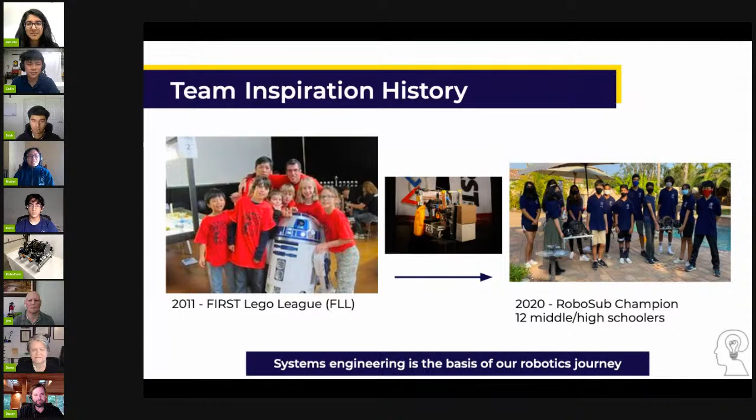Could you tell us a little bit about that pool? Yep, so this pool is used to test Navy material. It's quite large, and on the edges, it's very curved. So one thing that's actually interesting about that is when we were using sonar, it's supposed to simulate open water in the ocean. So we weren't actually getting many pings back from our sonar because it was supposed to just bounce off the wall and go off in different directions, as it would not come back in the ocean. So it's to simulate or emulate when you put something in the ocean.

Right, it's anechoic, I think that's what they call it. As I recall, it's like 4 times larger than an Olympic-sized pool, and I think it's like 35 or 40 feet deep. So it's not a pool like we think of it. It's really big. Yeah, I posted a link to this in the chat. You guys can check it out, and it seems like all types of people test their AUVs and different types of sensors in here.

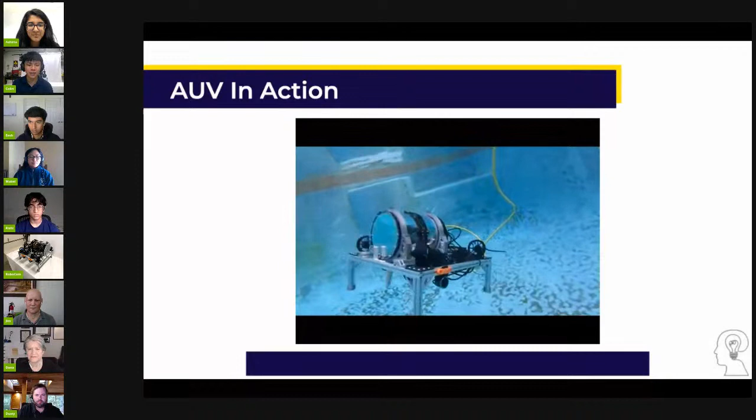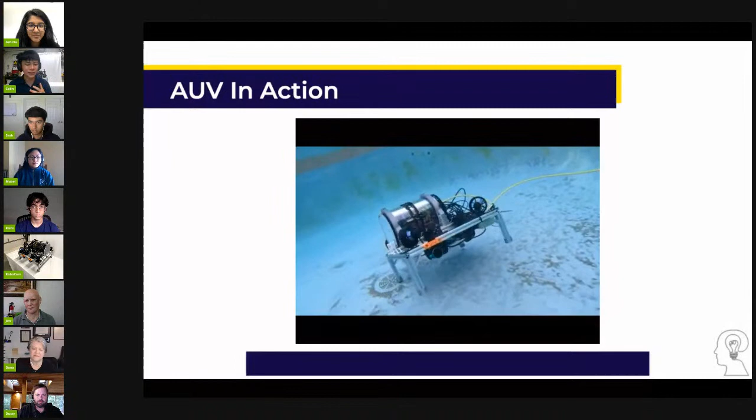So this is actually an in-water test of our sub. This sort of gives you the scale in a little bit smaller pool. We actually have a tether going for remote operations, but in this competition we're not allowed to use a tether. So because our Wi-Fi can't penetrate the water, we actually have to make our sub completely autonomous. You can see one of the main differences between an underwater vehicle versus a land vehicle is that now we have that 3rd degree of freedom. So our robot is pitching and yawing and then also moving in the XY direction as well.

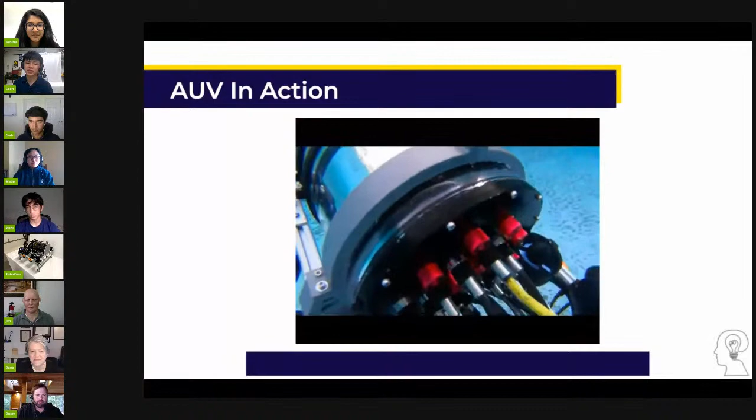And then you can see the different sort of considerations that we'd have to make: the positioning of our thrusters, as well as the penetrators in the back of our enclosure to connect up all the sensors into the electronics. So we'll be going a little bit more in depth about the system throughout this presentation.

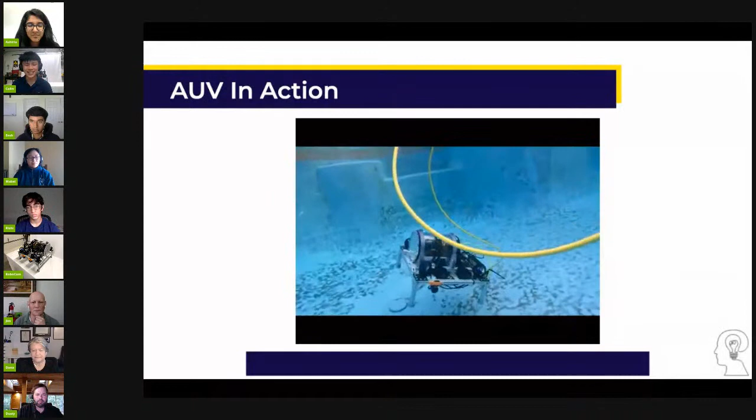Did you guys all build and design this yourselves, or is that something you just bought? Yeah, so we actually used an off-the-shelf ROV before constructing our custom one, just to get the idea and get the inspiration from it. But this actual sub was our third custom sub we've built, and we've just been building off of our previous experiences to get to this sub. Wow, that's so cool. I bet that takes a lot.

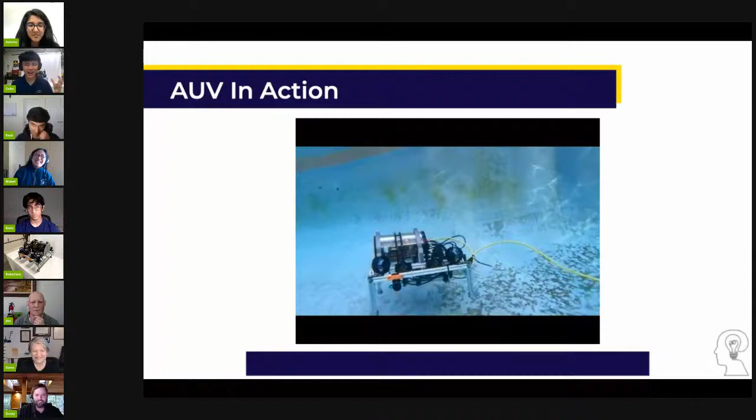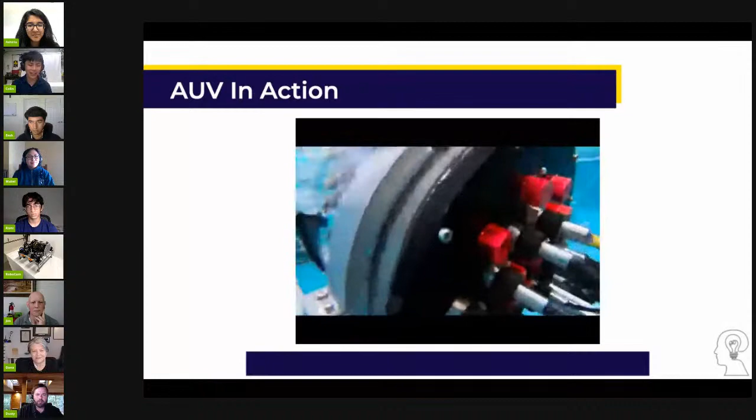Do you get any leaks? Yeah, so we've actually gotten many leaks, and this is sort of how we went to our newest penetrators. So the thing about underwater robotics is that when you pull your sub out of the water, you can actually see rolling water if any water has gotten into your enclosure. So that's something that we got to train our team members to see and catch. Some teams have leak sensors that, when they get wet, send out a signal to cut the thrusters and surface, but we haven't been able to implement that technology into our subs yet.

So instead, we submitted a technical paper that was under 10 pages that showcased the novel aspect of our system. We also did 2 skills videos. Ours were about sensor optimization and hull design, both under 11 minutes. This replaced the on-site judging, but also acted as a how-to guide for future teams who want to do RoboSub.

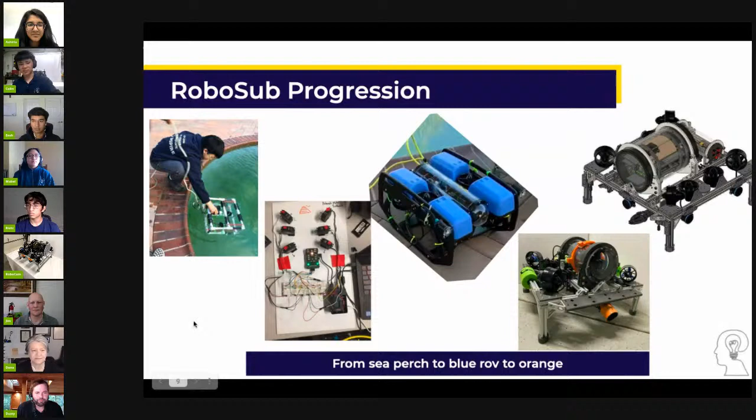Gotcha. You people scare me. I'm just going to go straight to the top.

We try not to. But just highlighting our competition time frame, this past year, we actually had 2 weeks of really dedicated and focused time to RoboSub. The season was actually compressed this year, and we had to finish up our finals previously. So to make the most of our time, we actually utilized parallel prototyping, and you can see this on the electronics board where we explored exotic options while also having other team members explore more traditional options.

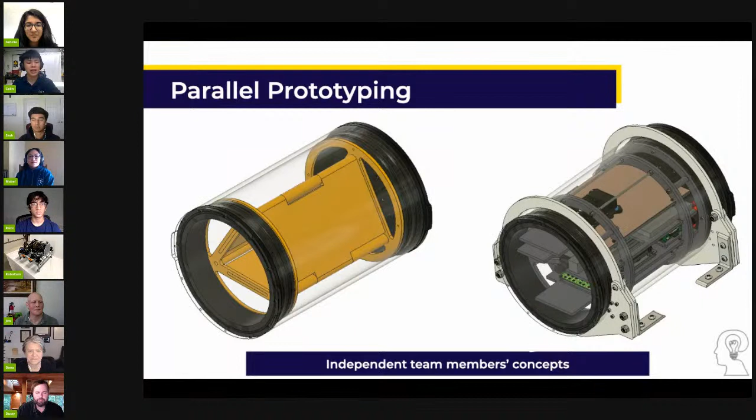And this, if you go to the next slide, is continued for our torpedo shooters. So this is actually one of the missions that Asheri was alluding to, where our sub can use pneumatics or any other propulsion methods to send out a projectile to go into one of the targets. And you can see 2 different options, either air power or on the right, an onboard battery and an onboard motor to send the torpedo out.

So you guys fully model this and make CAD models of everything beforehand? That's correct. And this is our way of communicating things to the judges without actually building them. And also this allows us to conduct design reviews with our team members and get different perspectives to make our models the best way possible before actually even testing.

Yeah, very professional. You guys should just do your own startup. You already got the whole thing down.

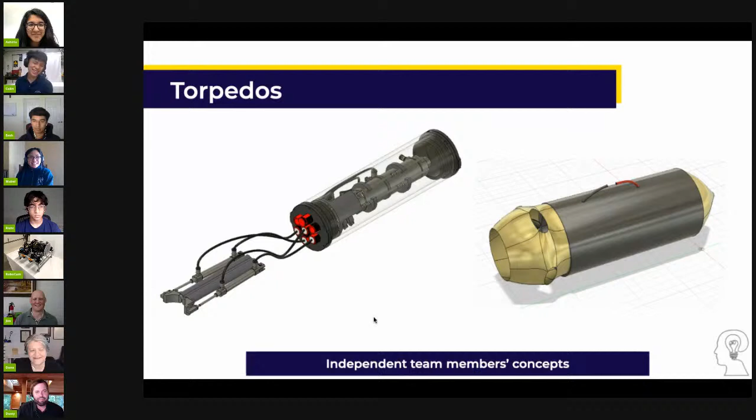Going on to the next slide, we extended this same idea for the electronics board, and we just wanted to highlight the tool that we use. We use Onshape specifically for the electronics board. They enable users to make their own tools using feature scripts, and the global variables were very helpful, as when you changed one variable, it changed multiple models around it. So that greatly helped us with our multi board design on the left, and also this server rack design using a PCB backplane on the right.

So is that like a custom backplane or just the enclosure? Yeah, so for our backplane this year, our third or second sub, Gray, I'm forgetting. But with Gray, the main issue we had was wire management. It was a mess. We did do a layer stack design, as we showed in our previous slide for Gray, which has a smaller enclosure, but it's kind of useless because if you have wires going in between the plates, you can't pull out any of the layers and troubleshoot or do any maintenance.

So to fix this, we custom designed a PCB backplane, which sits in the back, and each layer has another PCB attached to it. All the wires are localized within each individual layer, so now there's no crisscrossing wires going in between. The PCB backplane handles all the wire routing, power distribution, and we can localize generic components like USB hubs and Ethernet switches directly in the PCB backplane, so we don't need to use up that space elsewhere in the enclosure.

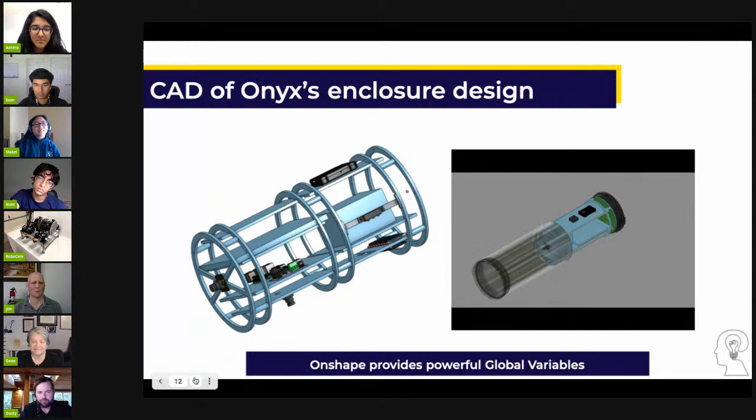Did he get disconnected? I don't see him anymore. Oh, yeah. Sorry. He dropped off. Colin, are you back? I am back. Thank you so much. Wrong shortcut. Yeah. No problem. Let's not click Control W anymore.

But anyway, moving on to our materials evolution. This is sort of highlighting the difference between subsurface and actually land vehicles. So our 3D printed components actually took a beating from the sun. The heat within the enclosure, you can see our electronics board actually bent due to all the heat within there. And obviously breaking off from sort of the small inconsistencies within the 3D print.

So we've actually since then moved on to laser cutting and then also reaching out to sponsors to use multi-jet fusion. So a little bit more expensive, more robust 3D printing manufacturing method.

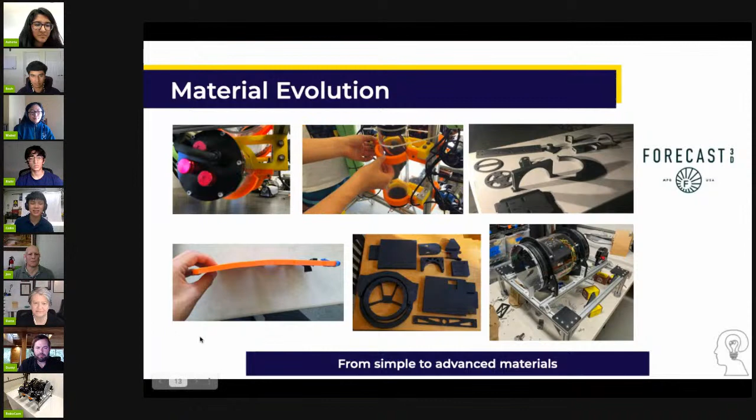How long does it take you to 3D print these? Yeah, so actually our previous print with all of the correct settings, it took us 24 hours to print 3 components of our enclosure clamp. So Ashia, if you could actually go on to the next slide, or actually next slide after that, pardon. You can see this is the enclosure clamp that I'm talking about.

So this is actually 4 components all slotting or fitting together. And 3 of these pieces actually took a full 24 hours because we had to print it with 30% infill and ensure 3 walls. So we're slowly increasing our print settings for even more durable components.

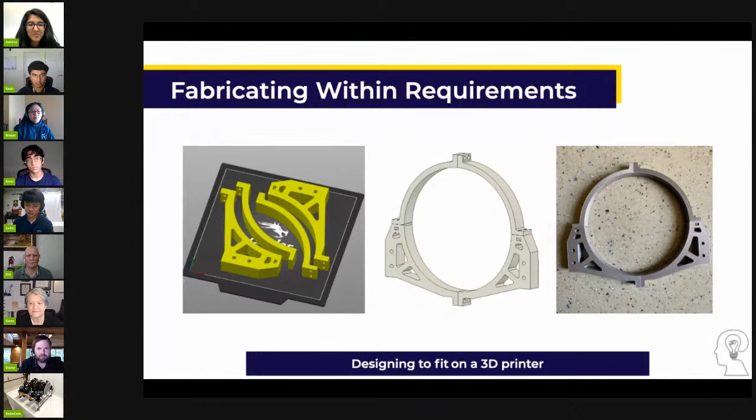And then sort of backtracking, we actually used stress analysis to see potential breakpoints within our 3D printed parts. And you can see a lot of the hinges and a lot of the corners where planes intersect took a lot of the force from the compression of the enclosure tubes. What tool did you use to do this analysis? We use Fusion 360.

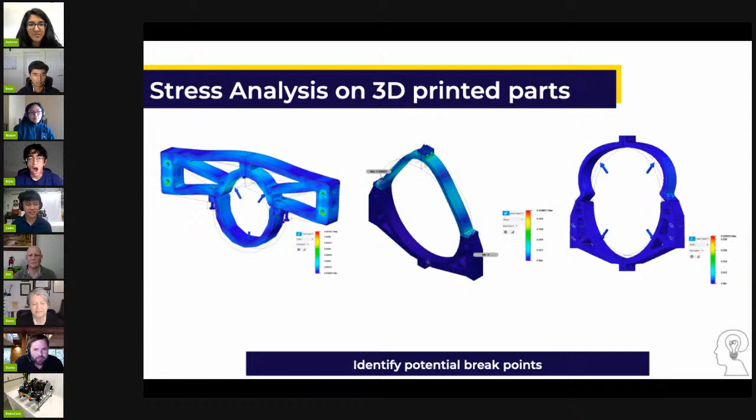So just as Colin talked about our iteration and evolution of the actual sub, we also worked a lot with making our tools better. To go back, in the very beginning, we mentioned leaks when it comes to our enclosure. In order to prevent these, the best way to go at it is use a vacuum pump, see if there's any air leaks. So you pretty much form a vacuum inside the enclosure and you see a gauge. And if the gauge shows that the pressure is increasing, which means there's an air leak somewhere, that also probably means you'll have a water leak in that same spot.

So before we had a standard off-the-shelf vacuum pump, and that was handheld and it took a lot of effort. And after a while, it actually wasn't accurate anymore and we couldn't rely on it. So then we took it into our own hands and we custom designed our own electric vacuum pump using a standard motor, which I think can go to -20 kPa, something like that. So that does the job as far as vacuum testing goes.

You just turn it on and leave it, and you can let it do its thing while you're doing other things. So that both saved us time and also a lot of handheld laborious work, which was really useful, especially when your hand got sore after doing it for like 15 to 20 minutes of just pumping that enclosure.

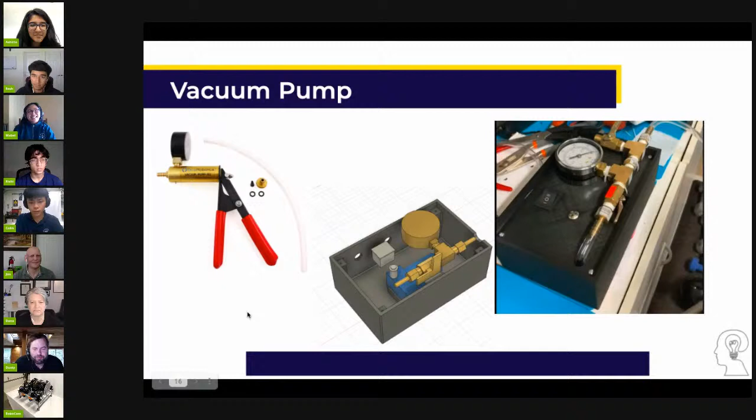Another thing was we changed our penetrators this year. Before, we had these standard epoxy-based penetrators. Pretty much, think of a tube and you stick the wire through it from the outside cable, and then you just fill up the remaining space with epoxy. You pot it and it would work, but sometimes you would have these little air bubbles or air gaps, which aren't normally visible to the eye.

So this also helped a lot with maintenance because we had an issue where some of the motors weren't working and we weren't sure where the issue was. We could just plug different motor cables into different ends on the enclosure caps, and we could see if the same motor is working on different ports or not.

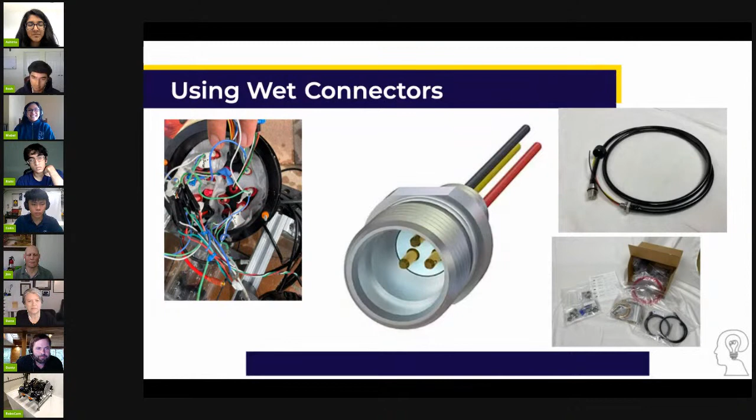All right, and this is a personal project, as I've also been the hydrophone lead. Hydrophones in this challenge are pretty important because one of the tasks is there's pingers along the pool. There's 3 different pingers and each are at a different frequency, beeping about every 2 seconds at 25, 30, and 35 kilohertz. So above human hearing range, but within the range of standard hydrophones.

In our version 2 design, we put in an active filter as well as an amp inside it and some other digital components such as a digital potentiometer, which would handle adjustable gain, if we wanted to increase or decrease the volume of the hydrophone signal. In version 2.1, I think I also added another filter at the very end of the circuitry to isolate any noise that was introduced. So this would make for a really clear signal, so you could hear exactly the frequency you want.

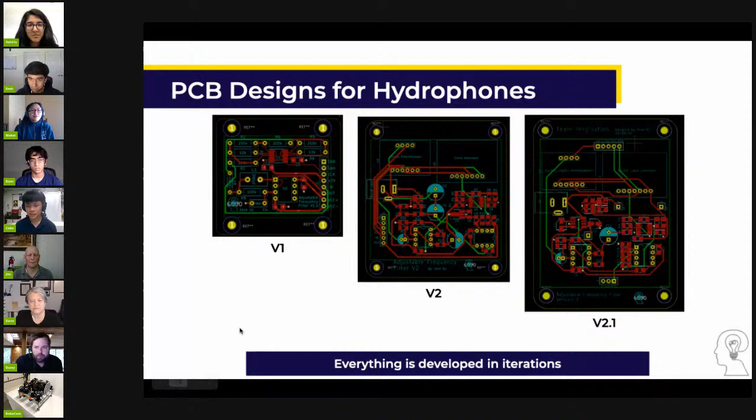And if we move on to the next slide, you can see this is what I've been working on lately. On my camera, I have one of the daughter boards right here, which I've designed. So 3 of these would plug into our main motherboard just for the hydrophone subsystem. All of our power distribution is localized entirely within it. And each daughter board contains the filtering circuit for each hydrophone, each with its own gain adjuster, whatever frequency selector you want.

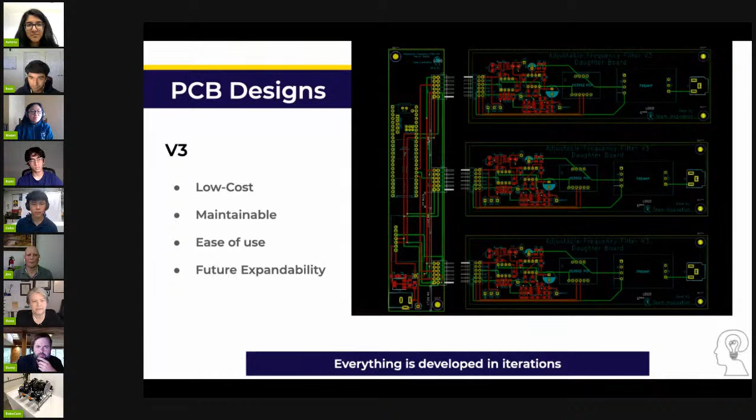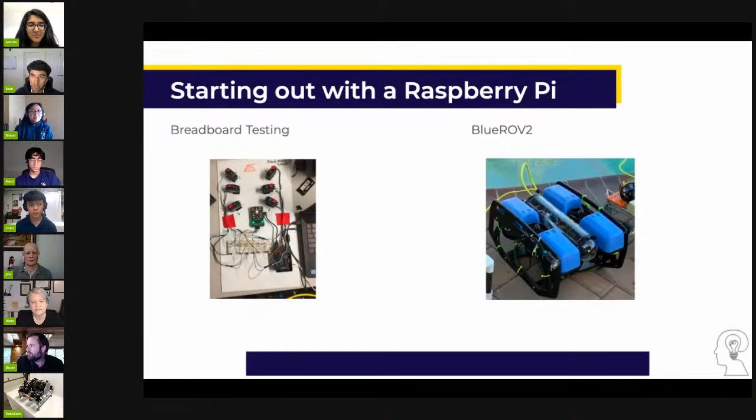So starting out, we of course started with the Raspberry Pi because it was what we were familiar with, and that was what was included in the BlueROV2. And then as we moved on, we realized we needed more. There were more requirements for a new processor if we wanted to do well in the competition. So we went to a Nano to be able to handle the CV, and it was also rather affordable and small, so it fitted our needs pretty perfectly.

We chose the Xavier AGX because, of course, more sensors means more resources required. We needed sensor fusion, robot localization, dynamic path planning, and of course, artificial intelligence, which the tensor cores in the Xavier AGX are really useful for. We also had a larger enclosure space available now due to us increasing from a 12-inch to 18-inch long enclosure. And we were also planning on putting in that heatsink, which Colin mentioned earlier.

This is just some specs comparing the Nano to the AGX, and you can see it's a pretty major increase, especially when it comes to that clock speed and the 4 more cores, and also that RAM. The RAM is that jump from another 8 gigs, and also it's now 256-bit, super important.

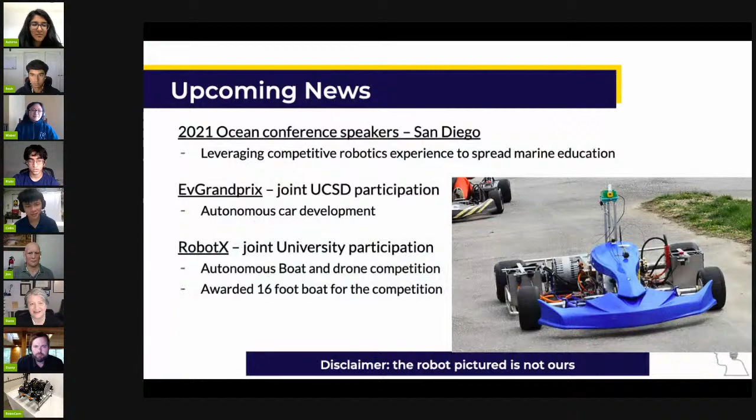This is all pretty cool. Looks like we're kind of running out of time, but I think we need to know what you're doing next, right? And maybe Mabel had something to say about that. Yeah, so our team actually recently got awarded a boat for RobotX. RobotX is basically the next level past RoboSub. It used to be a RoboSub and your boat working together.

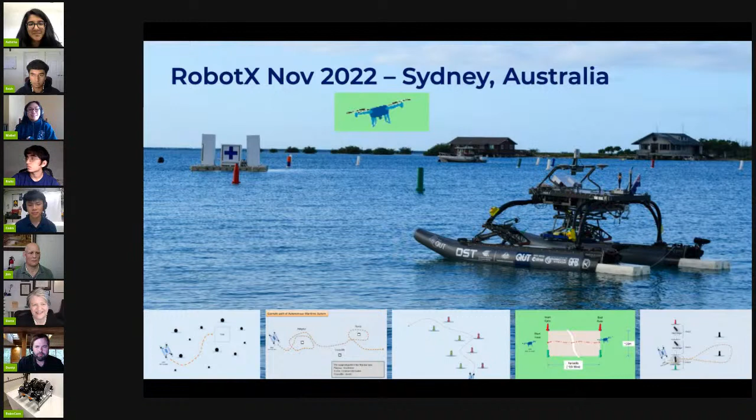This is not completely open water. It's going to be in a bay, but the same challenges still apply. And we are looking for teammates to join, as well as a lot of subject matter experts to help support all of us while we are taking on this new endeavor.

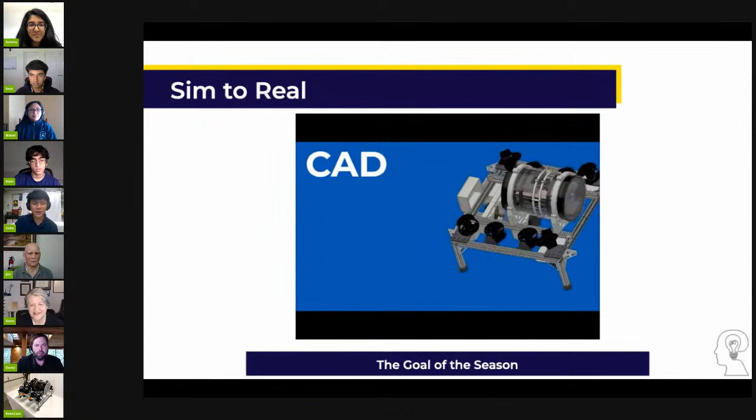Awesome. I know we kind of ran out of time here, but I know you have the simulator. If you want to show the video of that real quick, I know the audience would be interested because this whole sim to real thing is real big. You guys have built a really cool underwater simulator. Yeah, so this is sort of a promotional thing from CAD to simulation into the actual sub. This can be found on our website. Sheahen, if you maybe progress up 2 slides.

Yeah, and the one that is streaming on our Twitch channel is powered by an NVIDIA GPU. Using the thousands of cores that process simultaneously, it allows the simulation to look more realistic and process the simulated sensors and the environment better and faster. And then we're streaming that on Twitch so that people around the world can see it moving live, as Colin mentioned.